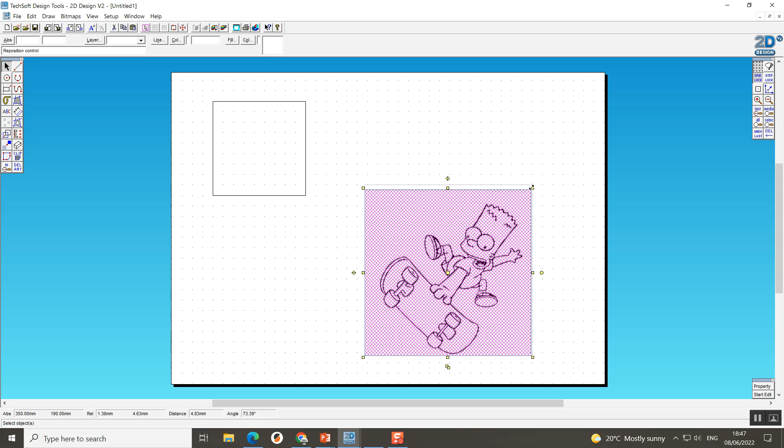Now we need to make this fit into that box that's over here. To do that, I can drag any one of these four corners. So I'm going to just drag this one over here, and you'll notice that it gets a little bit smaller, and I'm going to make it a little bit smaller again.

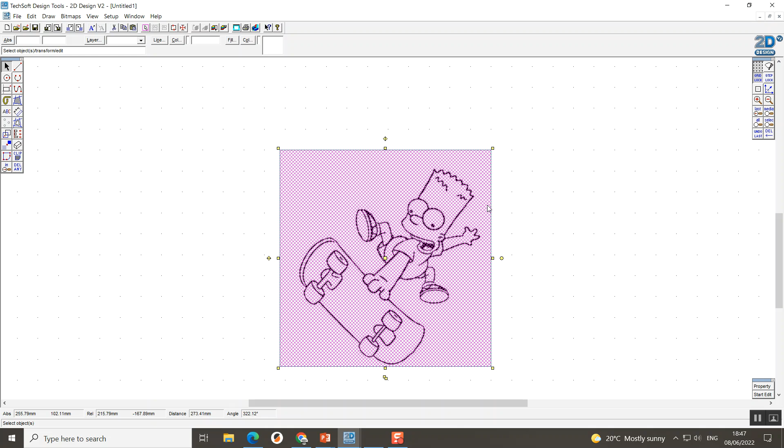Now to check that it's the correct size, if I hover over - and I'm going to zoom in here - if I hover over that yellow box there, if I left click and hold, I can move it. Can't move these ones because it just drags them, but if I select this middle one, it will move it. So I'm just going to zoom out again, and I'm going to position this into that box. As you can see, it's still a little bit too big... oh, a bit too small, and that's perfect.

And I'm going to zoom in. At the minute the laser cutter wouldn't be able to read this because it just wouldn't understand it - it would just literally engrave a black box. So we have to convert it into something that the laser cutter can understand.

So if I select it and it goes pink, I'm going to click bitmap, vectorize bitmap. So again, I left click this - bitmap, vectorize bitmap - and I'm going to click it again.

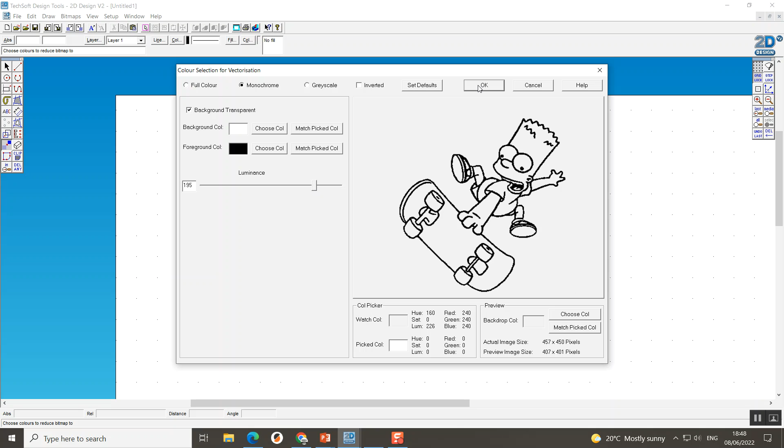I'm going to click monochrome and adjust this bar. I want to make it dark enough so you can see it clearly, but not too dark that you can't see the image at all. So it's about there. Then I'm going to click OK, and click OK again.

What you'll notice is we can now see the square, and our image looks almost see-through in certain parts, which is perfect because that's what we want really.

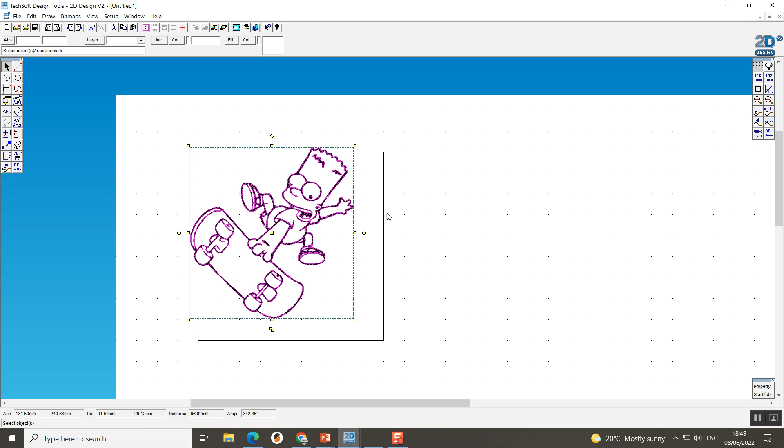Now when I'm trying to position it into the centre, you'll notice it won't actually go there, it keeps flipping over to the sides and won't accurately go in the centre. So if I untick gridlock again and just move it, now it perfectly sits right in the centre.

Now if I wanted to, I could add words onto this as well. So if I wanted the bottom of the skateboard to say Bart, I would click the ABC tool. It's right there because I don't want it on a curve, I don't want it in a box, I just want a standard word.

I then click where I want to put it. So I might want it up here, or I might want it on his skateboard, which I do. So left click, and I'm going to type Bart.

But I also want to change the font and maybe the size and maybe make it bold. So I'm going to click settings, and choose a font that we use quite often in DT. I'm going to keep it regular.

Now obviously you can do whatever name you want, you can use whatever font you want, it's completely up to you. I'm only using Bart because it's Bart Simpson. I'm going to click OK, and what you'll notice is your text appears.

Now obviously that's far too big, so I need to select one of the corners to make it a little bit smaller. I'm going to also rotate it round by clicking that yellow circle, and then use the middle one to move it further down.

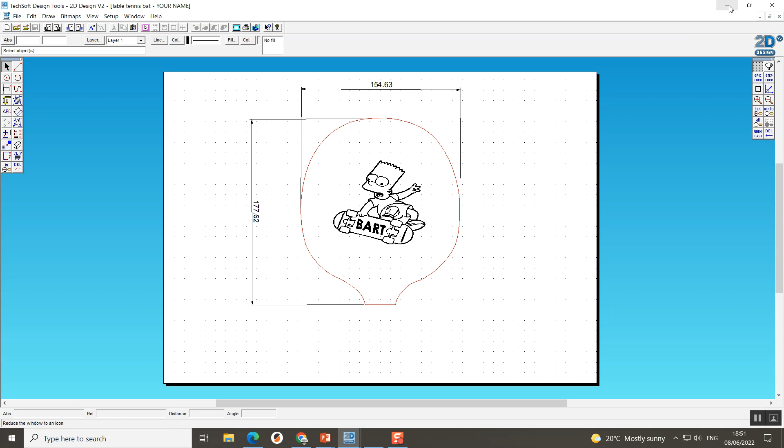So to do that, I'm going to zoom out. I'm going to go back onto Google again, but this time I'm going to write table tennis bat outline.

And you have to do it on Google because we're looking for this image in particular, so that everyone's got the same one. Then I'm going to right click it, click copy, go back onto 2D TechSoft again, right click paste here. What you'll notice at the minute is it's upside, well, it's slightly to the right, and we don't want that. We want to twist it all the way around.

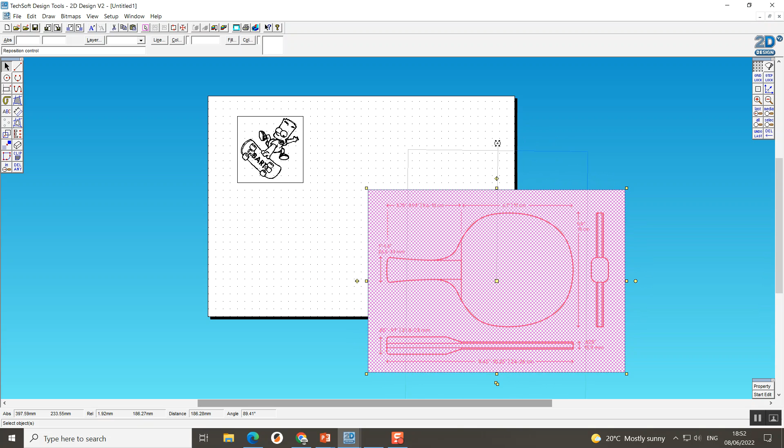So I'm going to left click, hold, left click and hold, and then rotate it all the way around like so. And that's perfect. I'm going to reposition it just so it's in the middle of the board, and zoom in a little bit so I've got more control.

Now what we need to do is trace all the way around the outside of this bat. So these red lines you see here, just these, we need to trace around them. To do that, we're going to use a path tool, or a spline tool as I like to call it. It's basically dot to dot.

So I'm going to get that tool there, left click, and I'm going to click from there, dot to dot to dot, as accurate as I possibly can, and I'm going to go all the way around like so.

I'm going to go all the way around the bat. This will take a little bit of time, but you need to make sure it's accurate, because if it's not accurate, then you're going to end up with a laser cut bat that isn't accurate basically.

Once I get to near the end, like so, I'm going to double click, and you'll notice that black line all the way around the shape. I also want to add a straight line just around about here, so I'm going to click the straight line tool, left click here, then go across and left click again, like so.

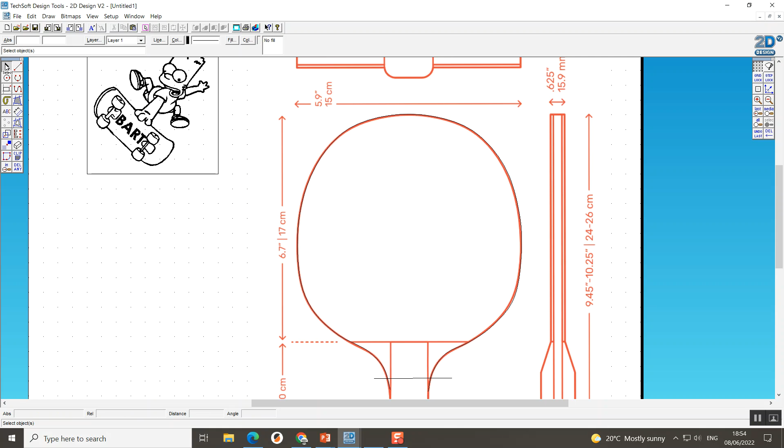At this point, if I get the cursor tool, I can select the image and click delete on my keyboard. Then I can delete that image away because I don't need it anymore.

Now you'll notice there are extra lines down the bottom that I don't want to cut out on the laser cutter. So I'm going to hold delete, left click and hold down, and look for the second option, which is delete part of an object. I click that and just click on those lines, and it should delete them. But do be careful, because if you click the wrong line, you'll have to get it back, which is where you click Edit, Undo. But you can only undo once, so you have to be really, really careful.

Now the next step is, this won't cut out at the minute because the laser cutter only understands colours. It knows that red is to cut and black is to engrave.

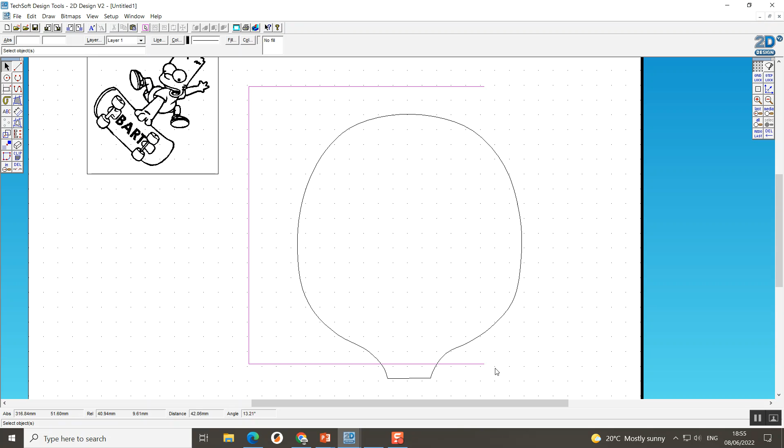So we need to change this line here to red. I'm going to select all, go up here to where it says line and colour, click colour and make it the red colour, then click OK. What you'll notice is this is now red, ready for cutting, and this is black, so it will engrave but won't cut all the way through, which is perfect.

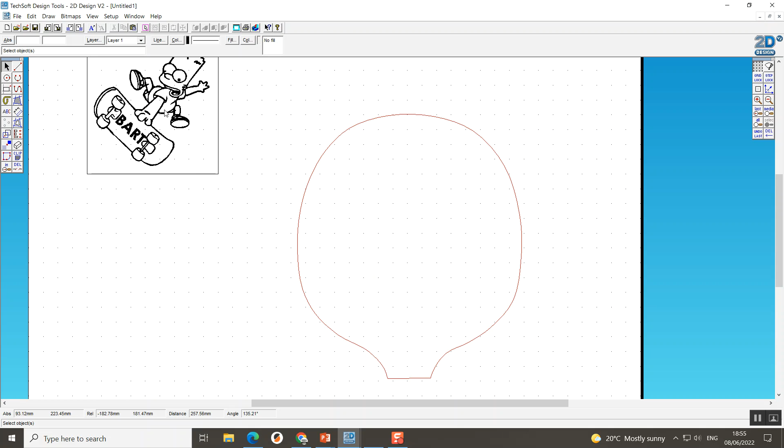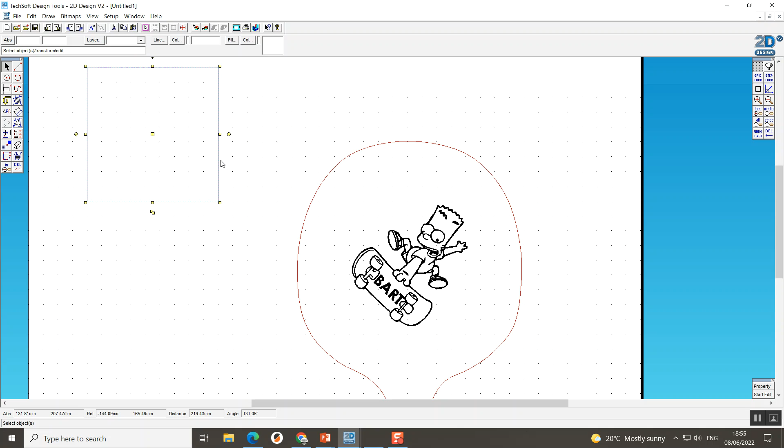Now what I want to do is position this here without the box around it. I want to move it into the centre of here, so I'm going to select the yellow square in the middle and position it about there, like so. I'm going to delete this box away by selecting it and clicking delete on the keyboard, and just zoom out to check.

Now at this point, if you're not happy with, let's say, the size of Bart, then you can make him bigger. But to be honest, I'm quite happy with that, to be fair, so I'm going to leave it as that.

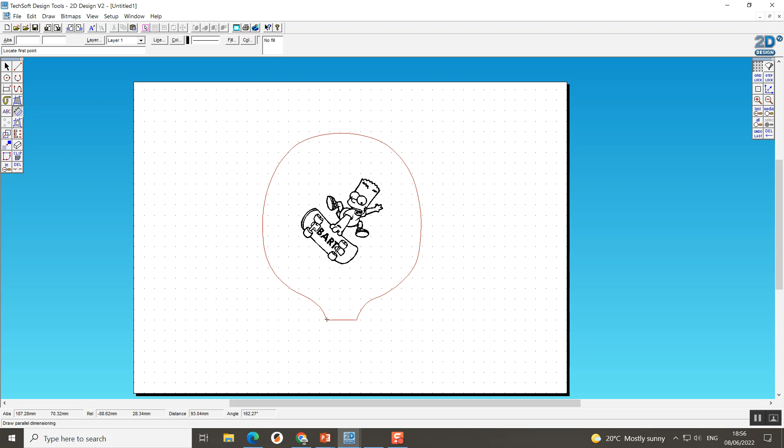Now the last thing I want to do is add dimensions to this so that people know what size roughly it is. So if I select the dimensions tool, left click hold, and go to the first one, I'm going to left click right at the bottom, then go with my line all the way to the top and left click again. Now I'm going to drag out to the left, and you'll see there's a little line that goes up and down. I'm going to position it roughly in the centre, then left click again, and it automatically comes up with the measurements.

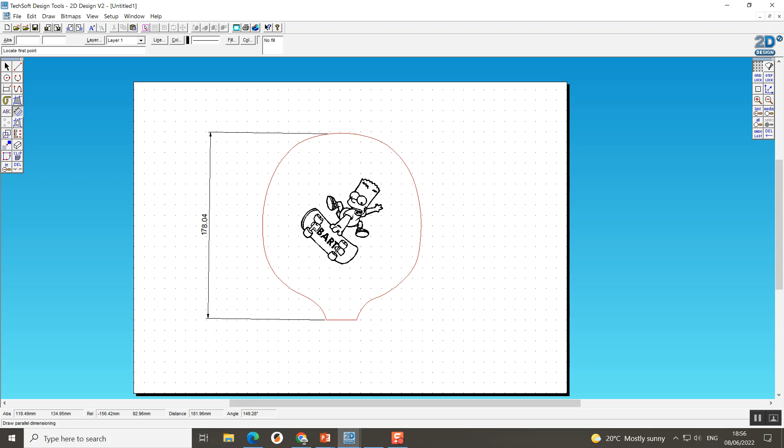Now I'd like to do it for the width of this shape as well. So I'm going to left click there, come all the way across, like so, click again, drag up, remembering that little line that moves has to be in the centre, and click again, just like that.

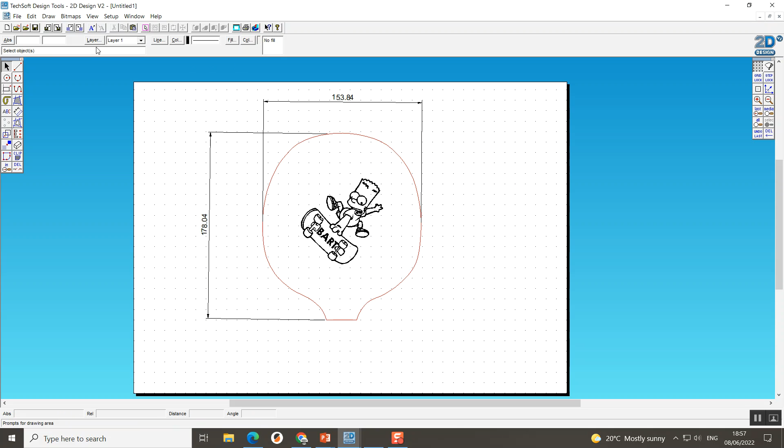At this point, you've completed everything you need in order to be able to laser cut your table tennis bat. All you need to do now is click File, Save As, call it Table Tennis Bat and then your name at the end of it, and click Save.